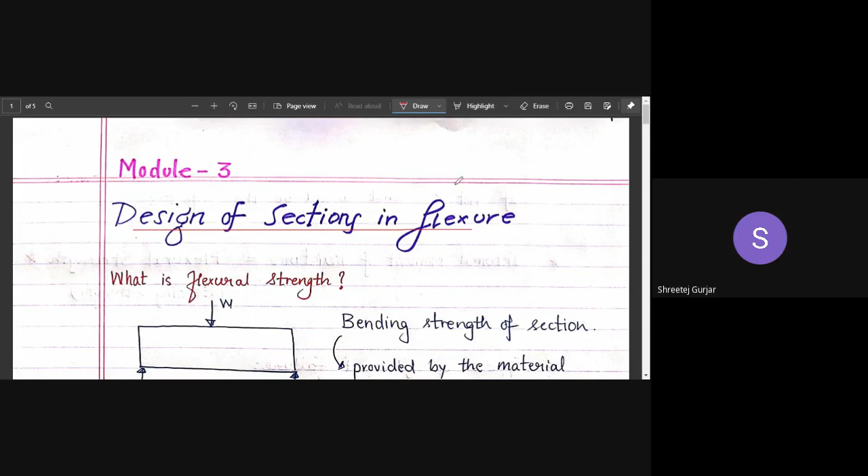In the previous class we had studied regarding flexural strength, various types of failures - failure in tension, under-reinforced section, over-reinforced failure, and several other failure modes.

We had derived flexural strength formulas, the moment of resistance formula MOR, for your rectangular section, or your T section in which your neutral axis lies within the flange. Neutral axis within the flange means it behaves like a rectangular section itself.

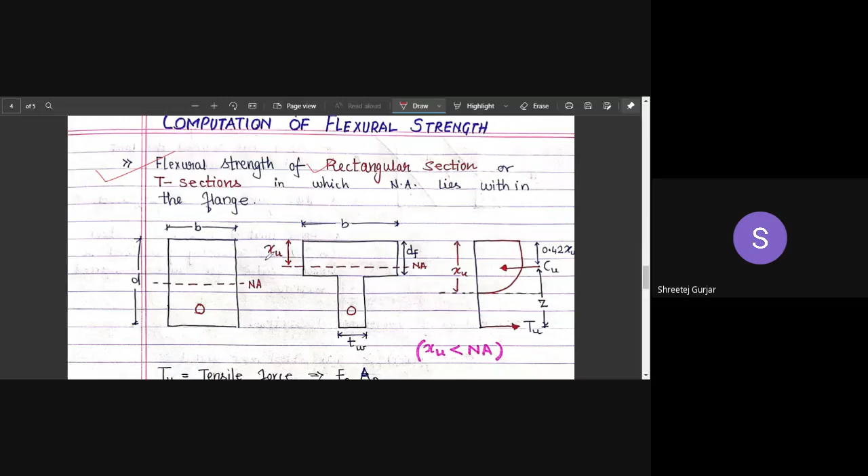So the formula which we derived is here: FPU into AP into D minus 0.42 XU. Keep this formula in mind, we will be using it further.

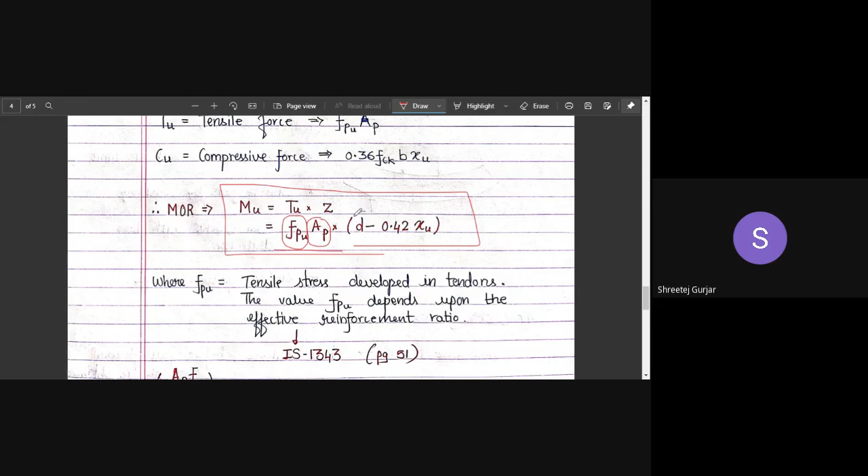The FPU will not be given to us directly - this will be found out from your code book, and we can calculate all the other things. I have told you how to use this particular code book to find FPU and XU by D - we will look into that when we solve problems.

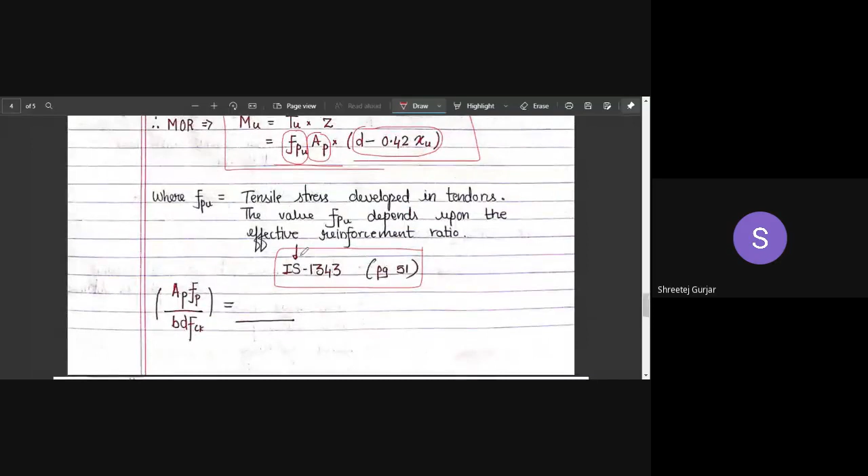Then for flanged sections, or when your neutral axis is below the depth of your flange - when your neutral axis is within the web - we have studied this particular thing.

We have derived this formula: moment of resistance, or flexural strength, equals FPU APW here - this part is for web, and this part is for flange. So FPU APW, similarly instead of this whole thing you can write FPU into APF. So this is the full form written here. You can use this, and D minus 0.42 XU is the same. Here we have to add one more bracket, D minus 0.5 DF.

So these two formulas we will require to solve your numericals. One more important formula you have to remember is this APF formula - very important, we will be requiring this.

Once you know APF, which we have calculated, all the things will be known. APW also we can calculate from here. D, XU - all these things are known. You can substitute and find out the moment of resistance.

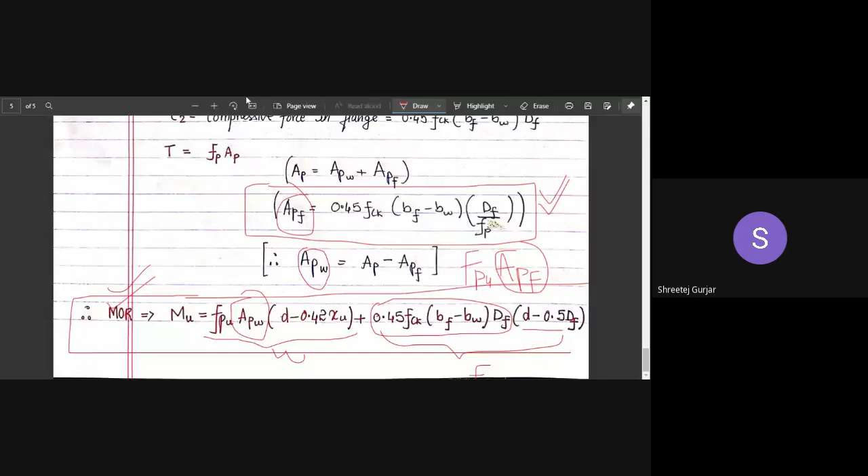So this is the first numerical. I hope you can see it on the screen. Can anyone please read out the problem statement for me?

Okay, so Shubham, are you there? Shubham Malji? Shubham? Yes, sir, can you please read the problem statement? Yes, sir.

A prestressed concrete beam, rectangular in cross section, 200 mm by 500 mm deep, is prestressed by tendons having an area of 600 mm square located at 100 mm from soffit of the beam. FCK is equal to 40 Newton per mm square and FP is equal to 1600 Newton per mm square. Estimate the ultimate flexural strength of the beam for the following cases as per IS code recommendation: first, if the beam is pre-tensioned; second, if the beam is post-tensioned with effective bond. Thank you, sir.

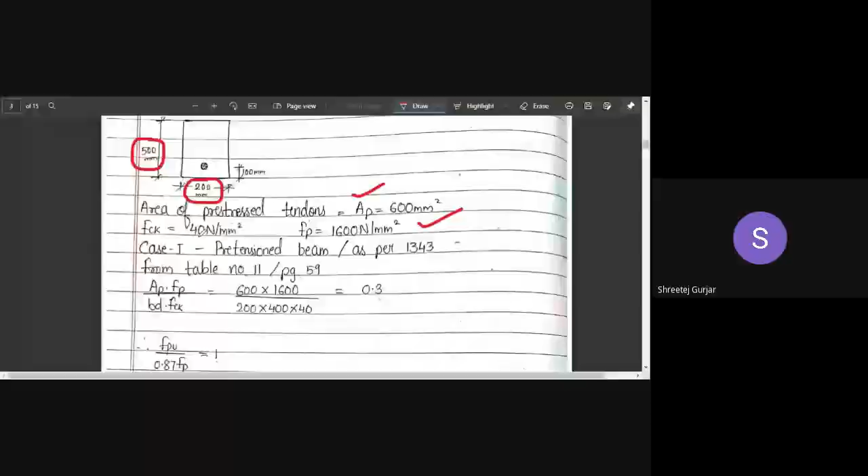Okay, then case one - we have two cases. The first case says we have to calculate the flexural strength as a pre-tension beam, from table number 11, page number 59. Let me just share this particular table with you - IS code, I'll share. Okay, there you can observe this particular table.

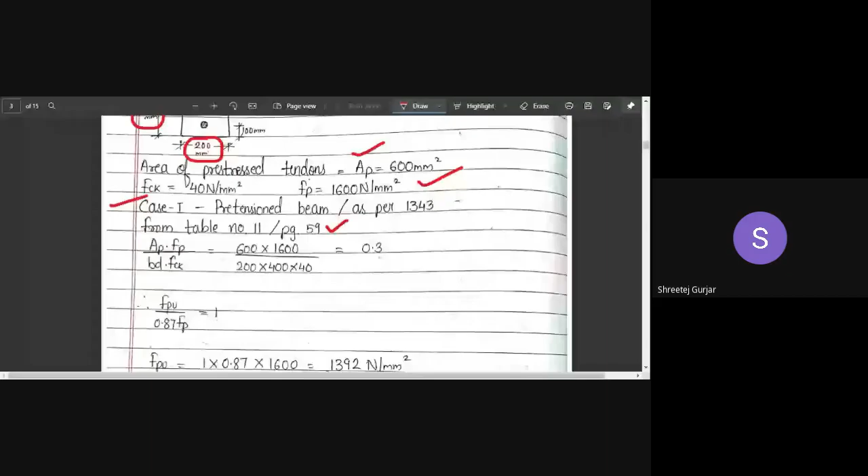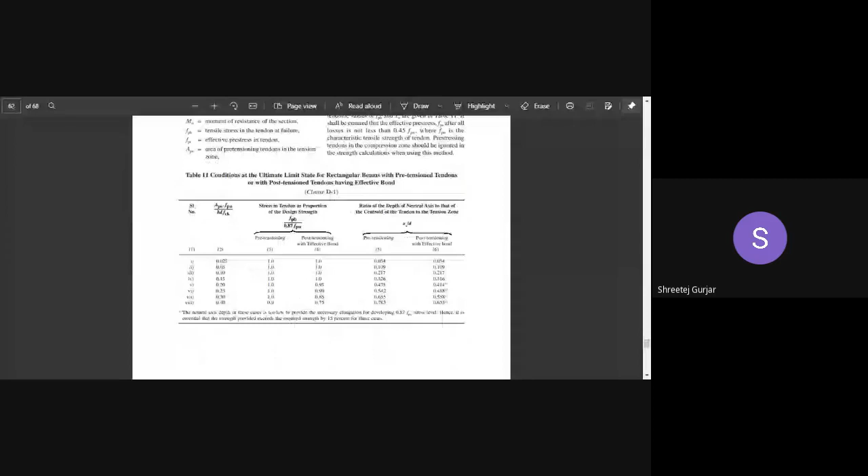Okay, so is the table visible? Table number 11, here you can observe, this is table number 11. Visible, sir.

Okay, so this table is applicable for both pre-tensioned and post-tension beams, but only in case of effective bond.

Sir, your voice is breaking, sir. Okay, when your beam has effective bond, you have to make use of this particular table.

Okay, is my voice clear now, or is it breaking up? Is it clear now? I hope it is clear. Yes, sir. Now it's clear. Yes. It is clear, no problem. Yes, sir.

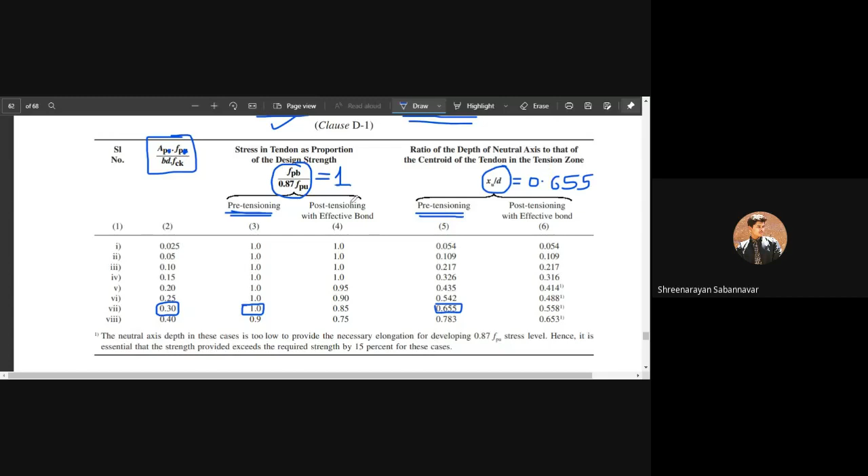Sir, can you explain the table again, sir? Maybe, yeah. Just a minute.

Okay, so this is AP into FP by BDFCK. AP is given to us. AP, that is area of steel, is given as 600, I think, right? FP is the pre-stressing force, stress, right?

Pre-stressing stress, that is also given. B, that is the cross-sectional area, that is also given, and FCK is also mentioned. So all these values which are given, you have to substitute and find that particular value, so it is equal to 0.3. Once you substitute all these values, you will get the answer as 0.3.

Okay, so 0.3 is here, so this is for this particular column. Then we have been given to consider the beam as pre-tensioned. So we have to use this particular column which I have underlined over here.

Okay, so for 0.3, the value for pre-tension beam is 1. The value of pre-tension beam is 1. What is the value 1 for? It is for this particular term, it is equal to 1. And this particular XU by D term is equal to

0.655. Okay, so what you have to do is derive this particular value, whatever 0.3 you get. For that, you have to check whether a beam is pre-tensioned or post-tensioned, and then you have to take out the value.

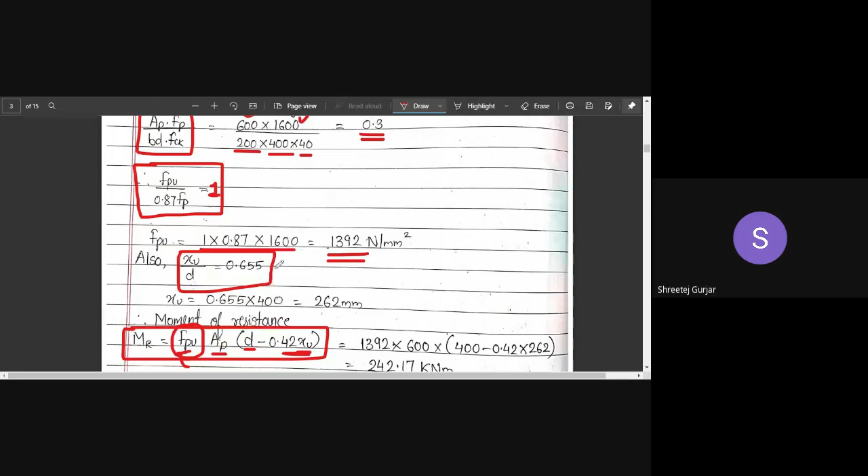The second thing that we derived from the table was this XU by D is equal to 0.655, right? This is the second thing which we have taken out from the table. So XU is unknown, which we need to find out. D is known, right? Effective depth is known, no problem. So 0.655 and D will come on this side.

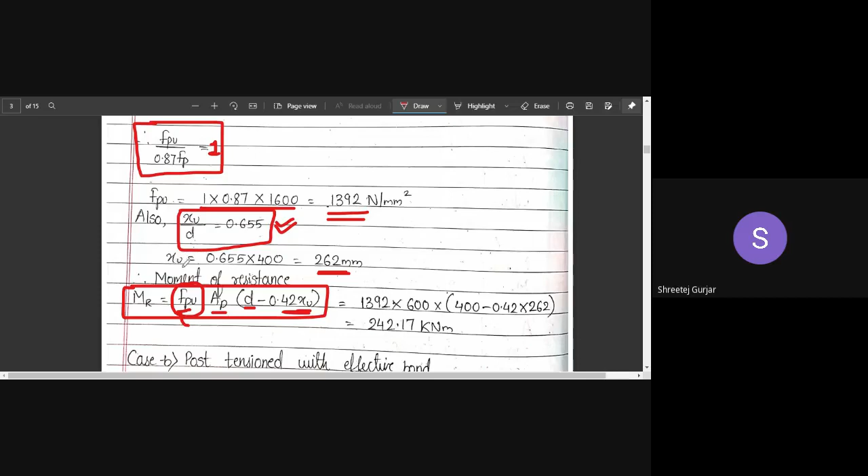So it will be multiplied by 400, which is the effective depth, so that is 262 mm, 262 mm. So we have found out the distance XU, right? XU, neutral axis distance, we have found out. We have found out FPU, all the other things are known.

So we can substitute back in this particular formula, right? MR, or moment of resistance, or ultimate flexural strength, is equal to FPU, which is here, FPU 1392 into AP is the area of steel, and then this D is effective depth. XU we have calculated as 262.

So substitute all this, make sure your units are proper, make sure all the units are proper, you substitute, and then you will get the answer 242.17 kilonewton meter. So this is moment of resistance, okay? MU or MOR, whatever you can denote it as, MU. Okay, so yes.

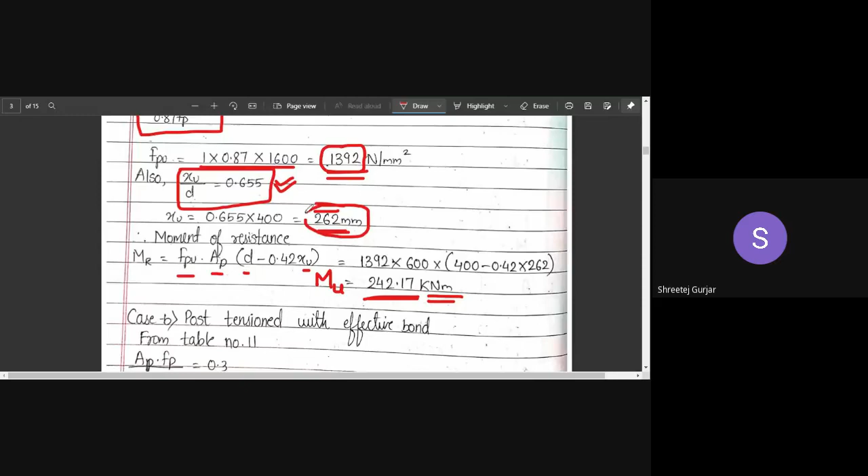XU in mm. This particular thing, XU, is in mm. It is nothing but the distance of the neutral axis, XU from the top.

Sir, that's okay, but the final answer should be in kilonewton meter. Yes, so you calculate this in your calculator. All answers are in mm, so the answer you will get is in Newton mm.

But what they have done is converted it to kilonewton meter, because it will come as a value in 10 power 6 or 10 power 9. So once you substitute in your calculator, you'll get a big value in 10 power 8 or 10 power 6 Newton mm. After that you convert it to kilonewton meter: divide by 1000 to get kilo, and divide by 1000 again to convert it to meters.

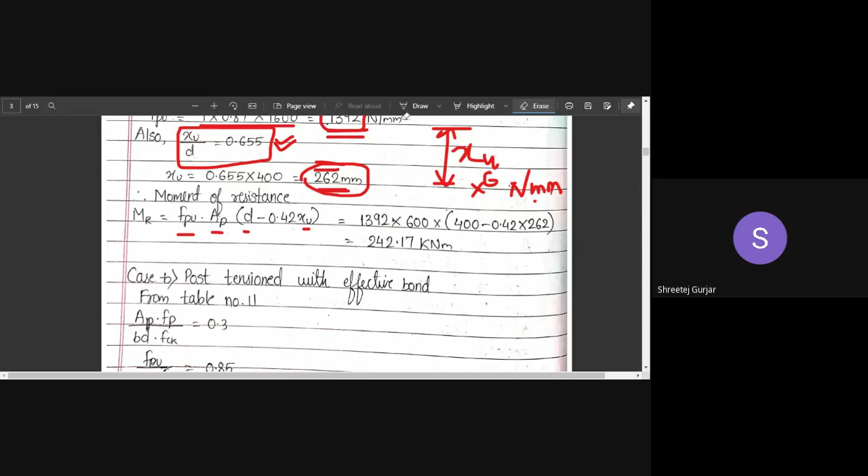Okay, so this is for when you assume your beam is a pre-tension beam. Next is when you consider your beam as a post-tension beam. Now we are going to consider our beam as post-tension one. You can see case B is post-tension.

So from the same table number 11, this value will not change. AP, FP by BD, FCK - this is what you have to calculate first. It is 0.3. So in the table, let me share the table now.

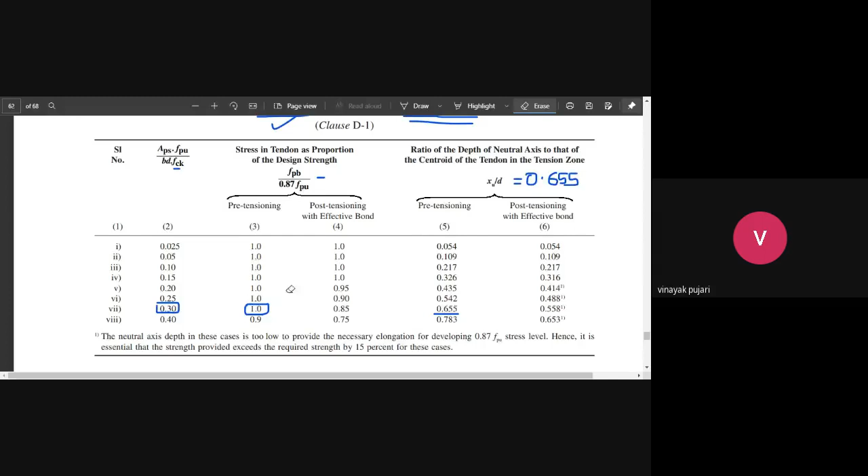Is the table visible? Yes sir. So from table number 11, this value we have calculated is 0.3. So 0.3, you have to check where it is here. If you do not have a whole number like this, if you have some in-between value, what you have to do is interpolate.

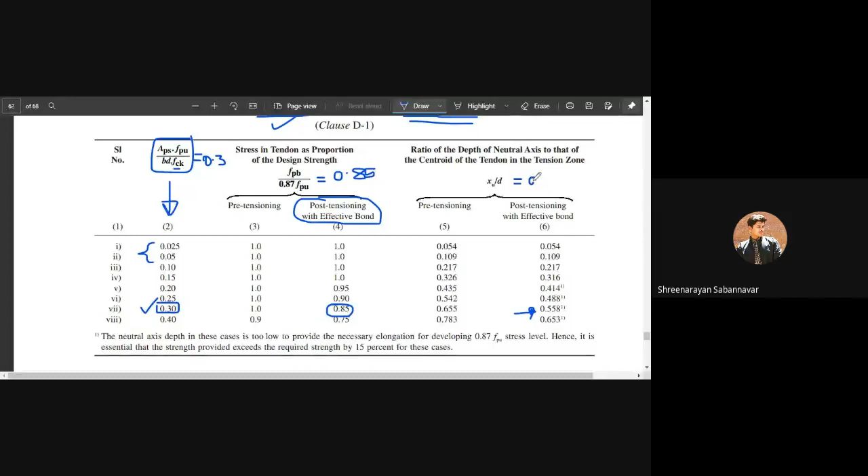Now our beam is post-tensioned, your beam is post-tensioned, so for 0.3 and post-tension, it is 0.85. So this term we have to equate to 0.85. Next, XU by D is equals to what? Can you tell me? It is 0.558. Correct, 0.558. So these two we will write in our notebook now.

Here you can see FPU, this particular term is equated to 0.85 and we have calculated FPU. Also XU by D is 0.558, which you told me, right? So D you multiply with this, you will get XU in mm. Substitute that back in your moment of resistance formula, and you will get the ultimate flexural strength of your PSC beam. This is a very simple problem for you to understand.

So is this particular problem clear? How to use table number 11 also, is it clear? Yes sir, understood, no problem.

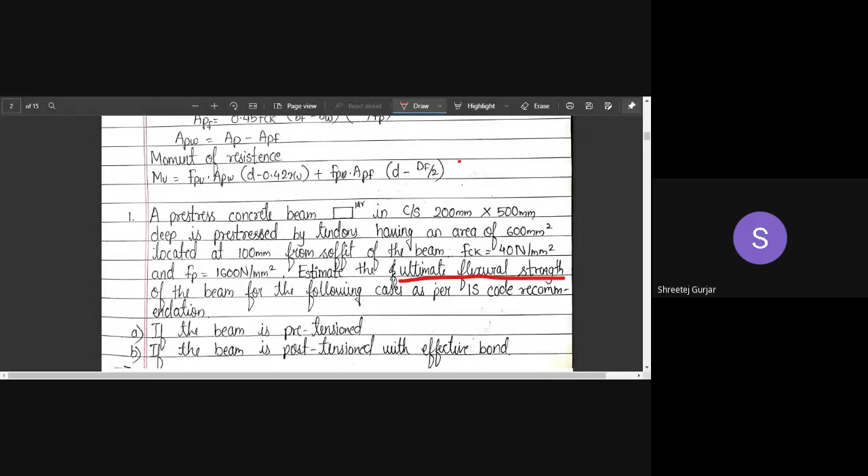AP is given as 4700, located at an effective depth of 1600 mm. So small d is given to us, effective depth. Next, if the characteristic cube strength of concrete and steel - this is FCK, characteristic cube strength of concrete, and this is 1600 Newton per mm square, the characteristic strength of steel. We will be needing these values.

Calculate the flexural strength at the limit of collapse in flexure for the T beam as per IS 1343 recommendations. So we'll write down whatever is given: AP is given, FCK is given, FP is also given. Now what we will do is assume that our neutral axis is within the flange.

Neutral axis is within the flange, we will assume, so it will behave like a rectangular section. So we will apply the formula used for rectangle, right? The first formula we will be applying. So what we need is FPU, we need XU. This will be taken from table number 11.

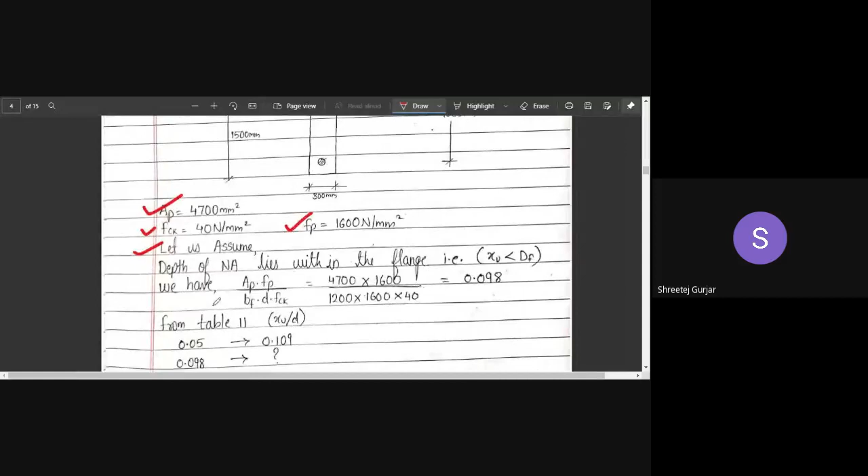Okay, so the depth of neutral axis lies within the flange. We have assumed that XU is less than DF, meaning the depth of our flange is 150 mm and our neutral axis is lying within the flange. So your XU value will be lesser than your depth of flange.

Okay, so we have to first calculate this particular value. For B, you have to use the breadth of your flange, BF, not of the web. You have to use BF over here. So AP is 4.

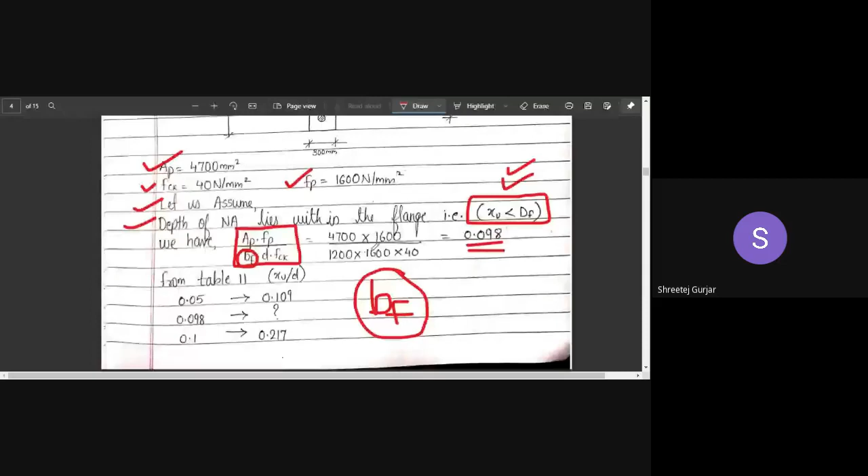The value is 0.3... 0.098, 0.098. So we will calculate only XU by D first. We will check whether the assumption we have done is correct, or whether we have assumed wrong. So first we will calculate XU by D. 0.098, remember this value.

Okay, so coming to table number 11, let us check where 0.098 comes. 0.098 will come here, right? It is coming in between these two values, correct? Yes, sir. No problem.

So we will calculate XU by D first, to check whether our assumption is correct. XU by D for pre-tension — our beam is pre-tensioned, so we have to consider these two values, 0.109 and 0.217. We have to interpolate now, and find out for 0.098 what is the particular value of XU by D.

Okay, we will move back to our notebook. So here, from table number 11, 0.1, 0.05 is taken from the table. This value is also taken from the table. This is unknown — we need to find for 0.098. So you can interpolate, right? I hope you know how to interpolate. So if you interpolate, you will get the value of XU by D as...

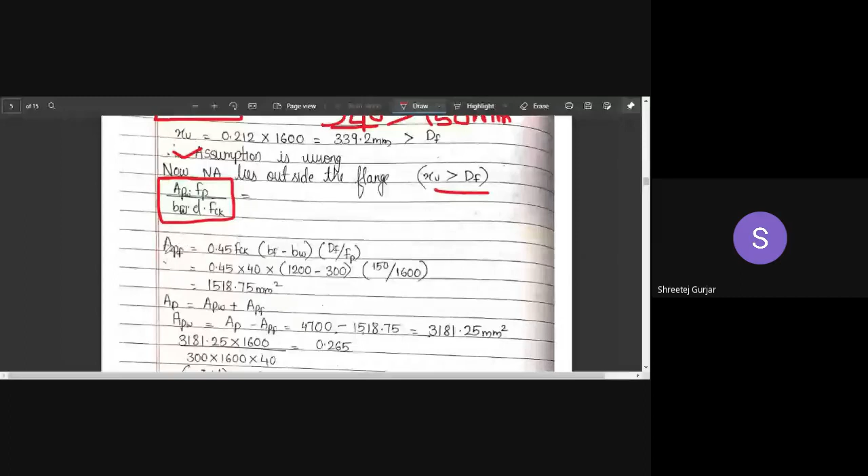Okay, so we have to use this particular thing to refer to table number 11, we have to calculate this. BW is known, all these things are known, but APW is unknown here. So we have to calculate APW first. To calculate APW, we have to first calculate APF, and from APF we will calculate APW.

Okay, so the APF formula we have is 0.45 FCK times (BF minus BW) times DF, divided by FP. You have to remember this formula. Then you can substitute all these values — FCK we know, BF the width of flange we know, width of web also we know, then depth of flange, and FP, the characteristic strength of steel.

Okay, all these values we have substituted. We have got the value of APF as 1518. Then AP is equals to area of steel in web plus area of steel in flange, the total thing. AP is given to us as 4700. APF we have calculated, so if you minus area of steel in flange from total, you will get the area of steel in web, that is 3181.25 mm squared.

Now we can substitute back in this formula. APW we can substitute 3181 here. FPBW, 300, D, FCK, all these things we have substituted. We have got the value as 0.265. Now moving back to table number 11.

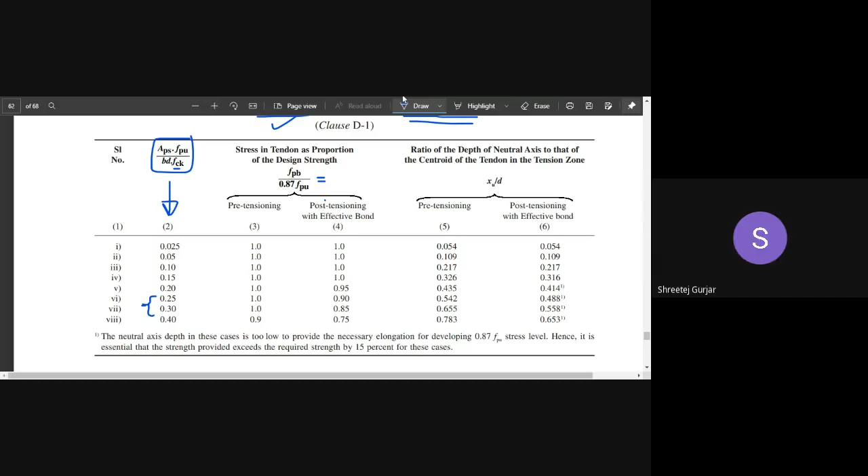So is it a pre-tension beam or is it a post-tension beam? Pre-tension or post-tension, let me check. I think it is a post-tension. Pre-tension, okay, it is pre-tension, correct. Pre-tension. So it is a pre-tensioned beam.

So you have to consider these two values for XU by D and for this particular thing. We have to interpolate. So what is our value? 0.26.

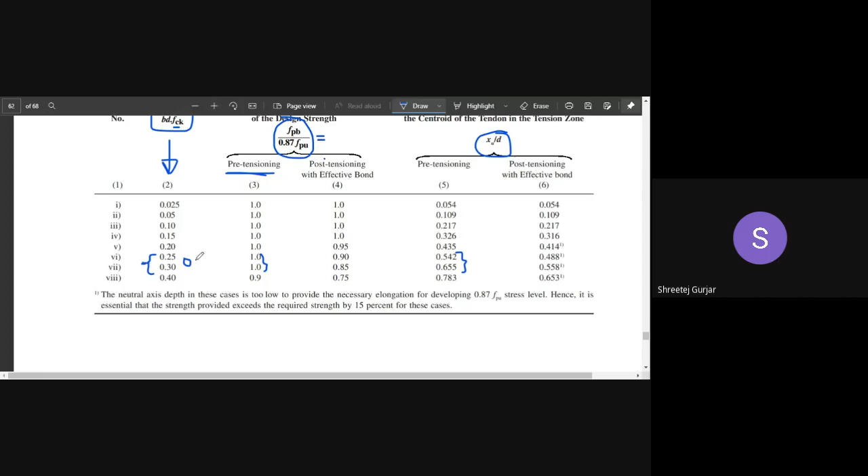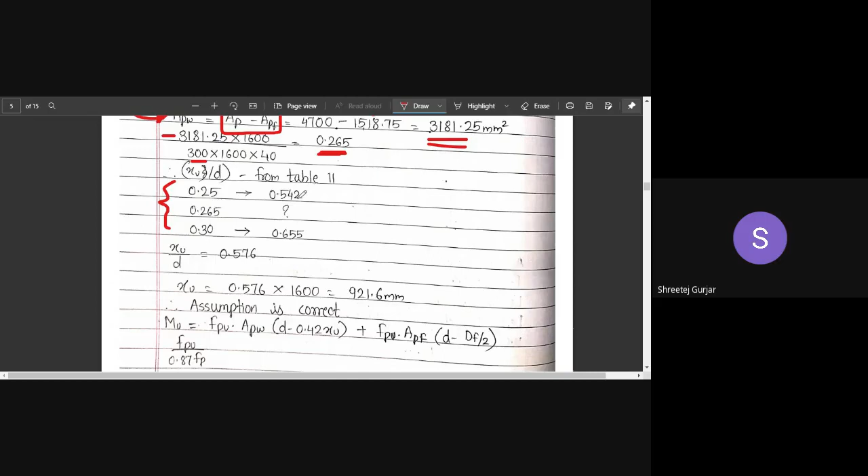Okay, coming back, you have to note down from the table and come back to your notebook. From table number 11, we have taken this XU by D. We have to find out the interpolate and find out the middle value, that is regarding our 0.265.

We have calculated, and what is XU now? XU, we have got it as 921 mm. Okay, assumption is correct, meaning XU is lying within the web, no problem.

Then FPU value, we need FPU. This is also got from table. Interpolate and find this middle value. So we have got the middle value and we have substituted. We have got the FPU value as 1392 Newton per mm squared.

So we know the formula for MOR, moment of resistance. This part is for web, this part is for flange. FPU is common everywhere. This is APW, here it is APF, D minus 0.42 XU, D minus DF by 2.

You know all these things, all these values are known. We can substitute and calculate the moment of resistance. It is coming as 9077, almost kilonewton meter.

Is this numerical clear? If you have any doubt, please let me know. I hope it is clear. Is it clear, guys? No problem? Yes sir, no problem. Others also please reply. Yes sir. Sanket sir, Ranganath. Then we have Prerna sir, Salahuddin. Yes sir, Shravan, yes sir. Okay, moving on.

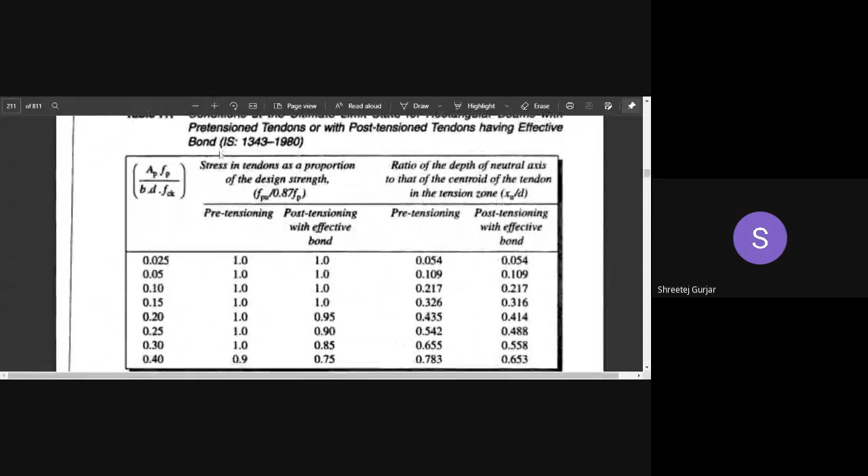Is the table visible? Okay, so this table is used for bonded tendons, and this other one will be used for unbonded tendons.

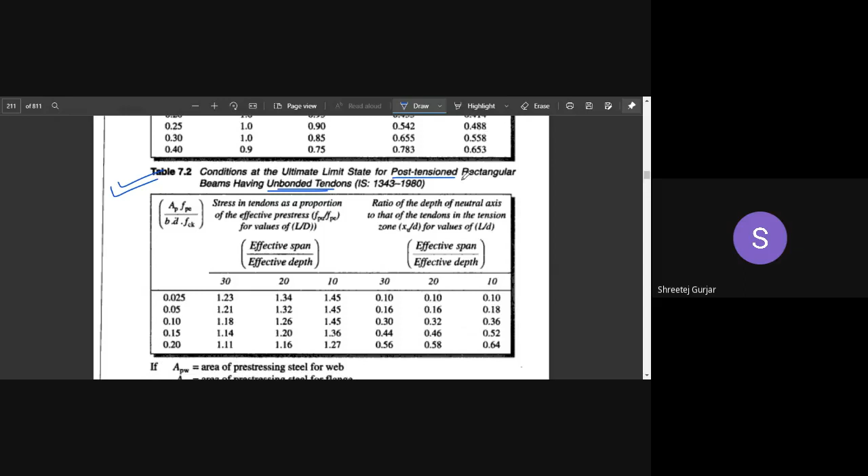Similarly, this is divided into pre-tension, post-tension, all those things. Here you can see it will not have pretension because unbonded will only be in post tension, since all pre-tension beams are bonded ones. Only post tension beams are considered in this particular table for unbonded.

So this particular term we found out - what was its value? 0.15. You can observe it here. Now L by D ratio - we have to find out first the length by depth of the beam.

Effective span by effective depth - what was that value? We have to calculate. Let us see. This is effective span by effective depth. So effective span was 15 meters.

Effective depth is 1 meter, correct. So 15 by 1 is nothing but 15. Coming back to the table, so what is the effective depth - sorry, L by D ratio.

It is 15, which is in between the table values. This is your effective span by effective depth values you have to refer to. It is neither 10 nor 20, it is in between - it is 15.

So we have to interpolate now. We take these two values and interpolate to find for 15. From here we will get the FPU by FPE value after interpolation. From here we will also get XU by D - effective span by effective depth is 15, which again is in between.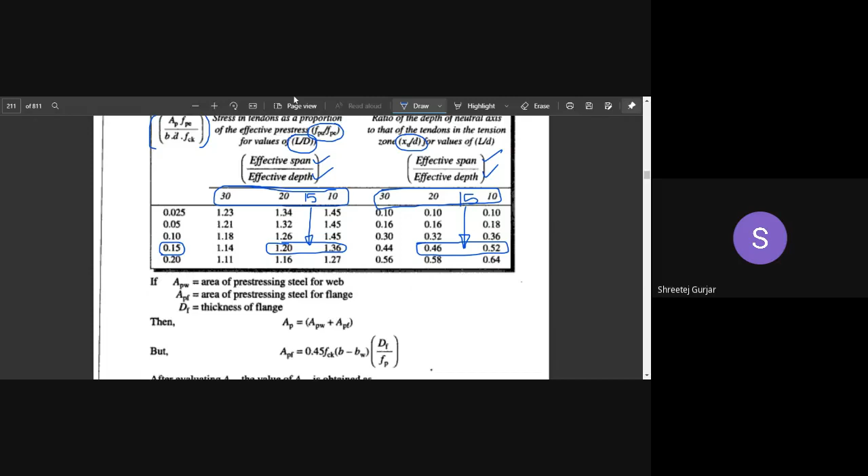Moving on, coming back to the notebook - FPU by FPE, this value after interpolation we got as 0.128, or 1.28. Correct? Yes sir, correct. You try and interpolate, you will get the same value - 1.28. So FPU by FPE value equals 1.28.

So we need the FPU value - FPE value is already given to us, the effective stress is given, so you take that to the other side, multiplied, and FPE is 1000 Newton per mm square. So multiply and you will get FPU. FPU is done. Next, XU by D value.

XU by D, you can interpolate it for 15. So XU by D value is 0.49, it is in between these two values, in between these two FPU values.

Which part did you not understand? FPU? Yes sir, this part - how to calculate it. Have you understood the table? Yes sir. How we have taken it out from the table, have you understood?

No problem, so what we'll do is we'll try to interpolate. Remember these two values, 1.2 and 1.36.

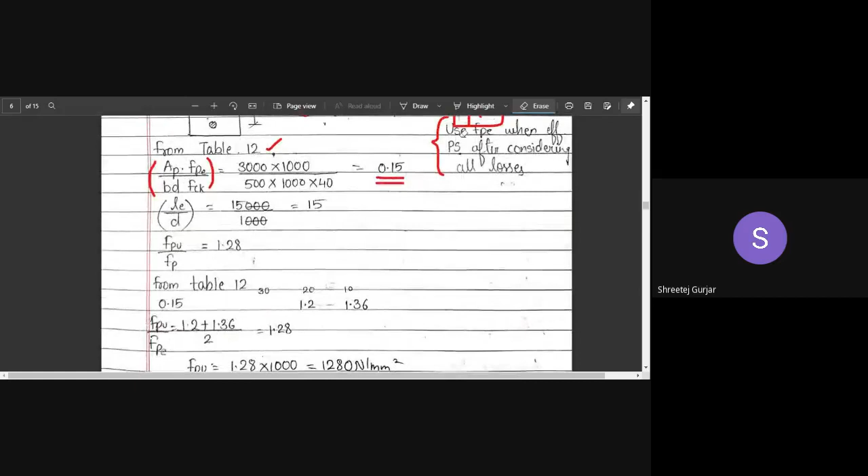So FPU value I found out. Similarly, XU by D you can interpolate. So here also they have taken average, because it is center, or between 10 and 20, at the center it is 15, so they have taken average. So it has come as 0.49.

So XU value will be what? This D will go on the other side, so it will become 490 mm. Correct, 490 mm. So we can substitute in the MOR formula, moment of resistance formula. FPU we have found out, AP is known, D is also known, XU we have calculated, 490. So substitute all these values, take care of units, and then you can write it in kilonewton meter.

3050 kilonewton meter is the moment of resistance of this particular beam, flexural resistance to be precise. Is it clear, guys?

Yes sir, clear sir, no problem. Yes sir. So the value we got after interpolation, is it in meters, sir?

We are converting into mm, it is in meters by multiplying by 1000. Which value? That XU by D value and this FPU, that is not in meters. This thing we have multiplied by 1000 because FPE value is 1000.

This value is going here, effective value, effective is 1000, so this is unitless.

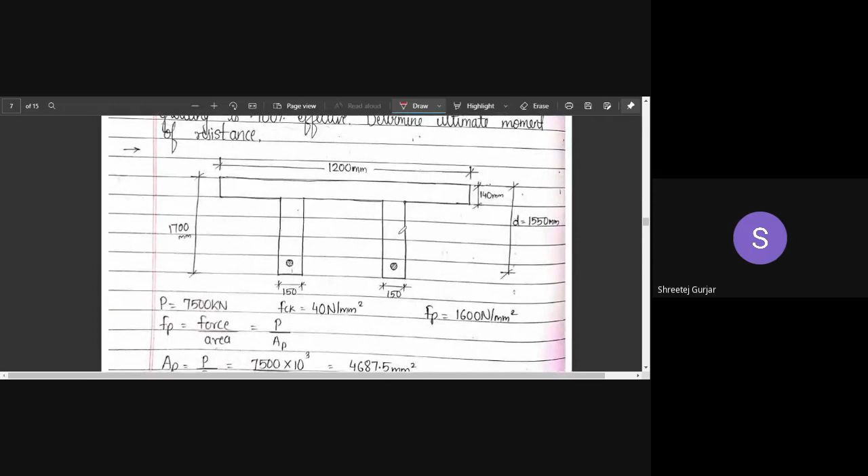Okay thank you. So you can see we have a double T section. No problem. The flange width is 1200, BF. Then this is BW, 150, thickness of your web. Then depth D, effective depth is given as 1550. This is the overall depth, do not use this depth, this is capital D. Do not use this depth, we have to use effective depth up to the level of steel. The depth of flange is 140 mm.

No problem, so what else have they given us? Prestress with the effective prestress, this effective prestress is given, no problem, in kilonewton. It is given in terms of force through a cable located at a distance of 150 mm from the soffit, and then characteristic FCK value is given as 40.

FCK is 40. Assuming that grouting is 100% effective meaning it is a bonded tendon, it is a bonded tendon, so it is a post-tension beam. Because of that it is taken as grouted - only post-tension beams are grouted. Sir, grouted means what sir? Grouting means putting cement slurry inside your duct.

After you prestress and apply your anchor, there is a gap - suppose this is your duct and this is your steel wire or tendon, there is a gap here, you can see there is a lot of gap. So that gap is filled by grout, injected later on. Cement slurry or other chemicals like epoxy are mixed, and then this part is grouted so that there is proper bond and your steel does not move inside the duct. So this is grouting.

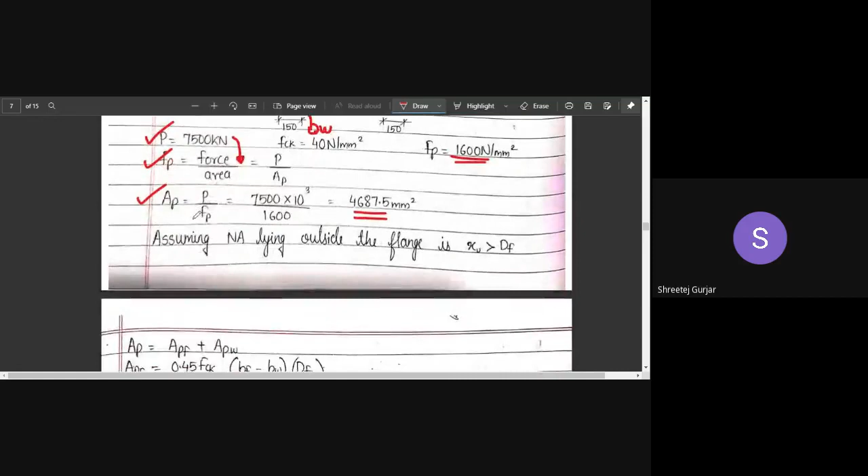Area of steel we divide, AP right? AP is not given, I guess AP is not given. Force is given and stress is also given, force is given, we do not have area of steel. So area of steel will be P by FP. So area of steel we have found out, no problem, 4,600.

Now the first thing we have to do is assume that the neutral axis is lying outside the flange. Why have we assumed it lying outside the flange and not inside the flange? Why have we assumed the second case as the first case? Usually we assume that the neutral axis is lying within the flange, that's the first case we usually do. But why have we adopted it in reverse format here? What logic can you think of?

Why have they done this? Because two webs are there, two webs are there. Can you explain a bit in detail? Why, what happens if we have two webs? So the weight adds up, no sir?

So I think you know why it is provided, but you are unable to explain. CGC will be here because of the weight distribution - you're saying CGC will automatically shift downwards, it will be somewhere here, right? Okay, so that is the logic which you have applied.

And one more thing is, why will they provide two webs? Because the neutral axis is below, that's why they have provided two webs, right? So if it was over here, what was the need to provide two webs? So that is the logic behind why they have used the second case.

XU is assumed to be greater than DF. Now we have to calculate the value of XU and check whether our assumption is correct or wrong. So this particular value we need to calculate for referring the table: APW by FP divided by BW FCK. Here PW is used, APW and BW is used. APW we do not know, so APW is calculated from this particular thing as we have done previously. APF first we need to calculate for that.

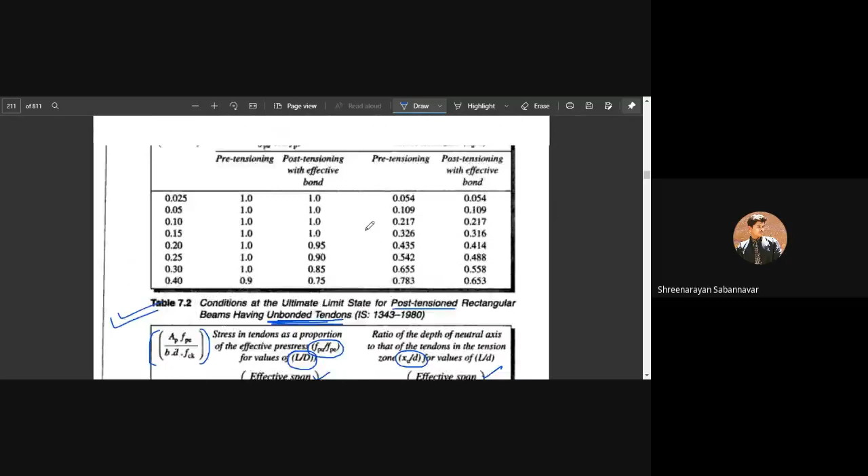It depends upon bonding - grouting, what you are telling, correct. So because in the question they have mentioned that there is effective bond, effective grouting is there, so there is effective bond. Hence we have to refer this particular table, table number 11.

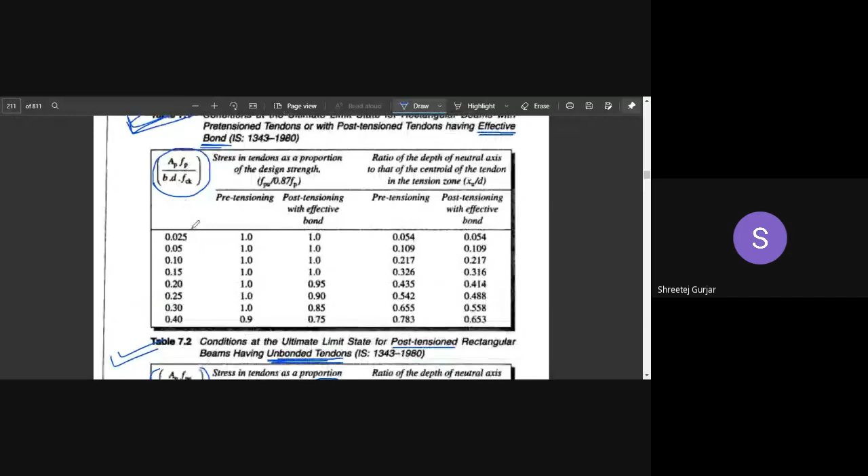Okay, so AP, what was the value of this particular term? We have calculated just now - 0.28. So it falls in between these two values. So it is what? A post tension beam, right? It is a post tension beam because grouting is done in post tension. Post tension grouting is needed, it is not needed in pre-tension.

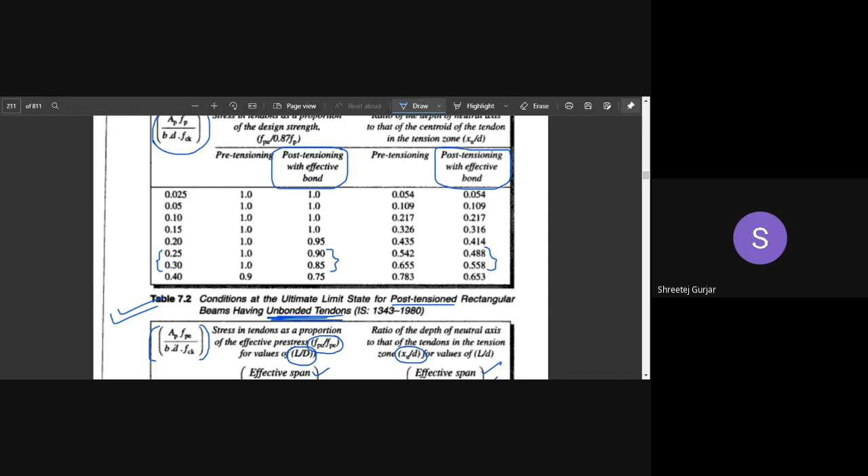So we have to interpolate and find out our values. These values are taken from table and equated to this particular value, and we have to interpolate and then find out. So you can see we have taken XU by D first. So it is in between, so we have to interpolate, and after interpolation we have found that it is 0.53.

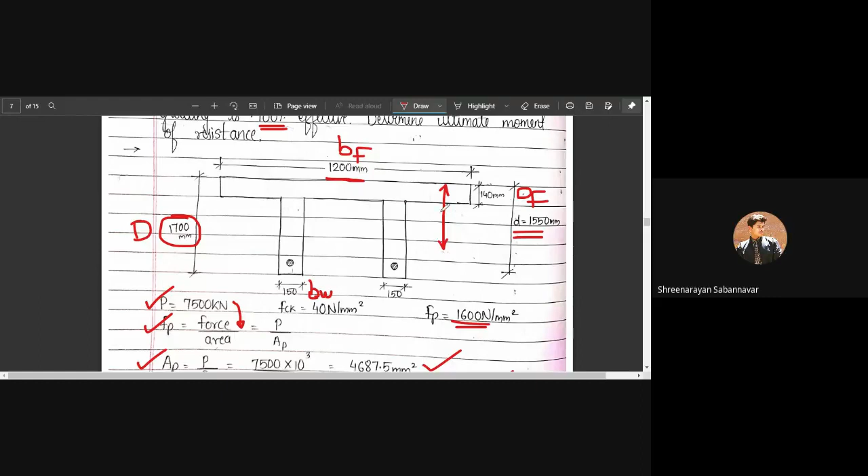So you can see clearly it is larger, so neutral axis is in the web. Our assumption is correct, no problem - 821 mm. Assumption is correct, no problem.

Next, for this particular term, we have to interpolate and find out. So we have found out after interpolation, it is 0.87. So FPU, we need FPU - all for FPU we have calculated, so it is 1211.

So this big formula we have for web and for flange. Substitute all these values, we know all these values now. FPU is known, APW we have calculated, XU also we have calculated, APF also is known. Substitute all these things, take care of the units while substituting, and you can see it is coming as 10 power 9 Newton mm. I've told you it will come as a very large value, so you can divide this by 1000 and convert it to kilonewton.

Divide again by 1000, convert Newton mm to meter. So in the end you can write in kilonewton meter - it is 8,128 kilonewton meter, a very large value, right, 10 power 9. So you can see the flexural strength of a PSC beam is very high, it can handle very large bending moments and very large loads.

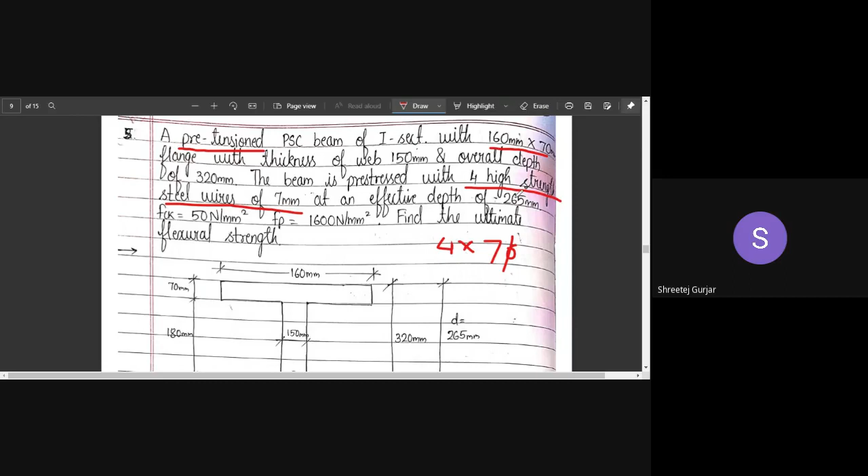4 wires of 7 mm diameter. And the effective depth of the beam is 265, which is mentioned over here as small d. FCK value is given, no problem. FP value is given. We have to find the ultimate flexural strength, or what we call as moment of resistance of the beam, also denoted as MU.

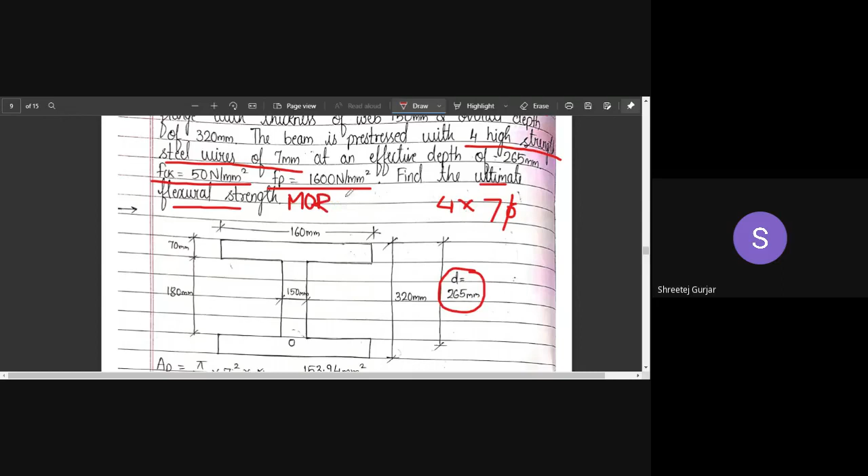So AP value we can calculate. AP value is what I have written here, right? 4 number of bars of 7 mm diameter. So pi by 4 into 7 squared into 4. Pi by 4 into 7 square is for one cable or one wire, and how many wires do we have? We have 4 number of wires. So AP value will be 153.

So this term we can find out next: AP into FP by BFD FCK, because it is a symmetric thing, right? So neutral axis will be over here. Let us check whether neutral axis, right, it is 68, it is 68, right? Neutral axis will be in this region, obviously it will be in this region somewhere over here.

But what they have done is they have taken first APBF, meaning they have assumed that the neutral axis lies within the flange. First case, meaning they have assumed that it lies somewhere over here. So the first case we will check whether the neutral axis is lying within the flange. Let us check for that.

So AP FP by BD FCK, but since we have assumed that it is lying within the flange, you have to take flange width, that is 160. If you assume that it is in the web portion, then you have to take the thickness of web, BW will come. But that is not the case now, we are assuming it is in TF, so we are taking BF, width of the flange. No problem, so substituting all these values, our term value is coming as 0.12.

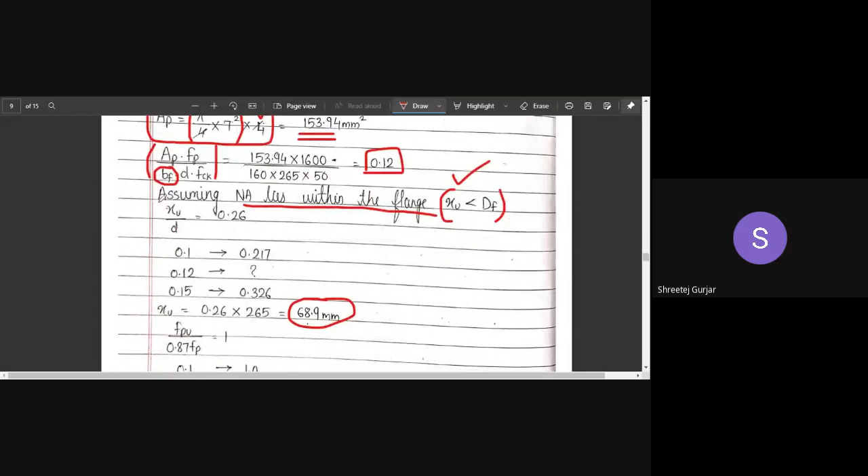Then XU by d from the table. We can take table number 11, pretension beam. So interpolation is needed because the value is 0.12, which is lying between 0.1 and 0.15. So interpolate and find out, and hence we have found that the XU value, the neutral axis, is lying 68 mm from the top.

So what is the flange depth? It is 70 mm, right, you can see it is 70. So you can see that 68 is lesser than 70. Hence our assumption is correct, neutral axis is lying within the flange, no problem, assumption is correct.

Surprising, very surprising, okay, no problem. It is very easy for us to solve now, no problem.

So you can calculate FPU from the same table number 11. FPU is got as 1, so multiply that: 0.87 into FP multiplied by 1, so I've got the FPU value. You can substitute back in the MOR, moment of resistance formula, and calculate the moment of resistance. You can do that as homework. So that is regarding this particular problem.

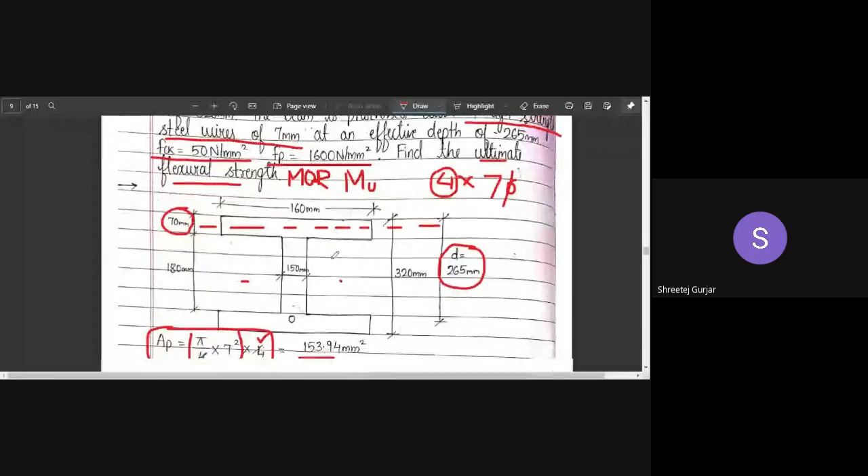So it seems a very complicated problem, right? We have an I section, all those things, but if you just check with the first case itself, it is coming out as true. So no need of going for the second thing, calculation is very easy. So in the exam, don't be scared by the looks of the numerical, just go through, just try to solve it, you will find out it is very easy. So I assume if it was not within the range, what do we have to do if it is not in the range?

How to guess that assumption, sir? So here what they have done is they have assumed directly, because they will already be knowing the results. Based on that, they form the question. So they know the thing, that's why they've done it that way. But in exam, you have to do trial and error. You have to assume the first thing, and if it fails, then go for the second thing.

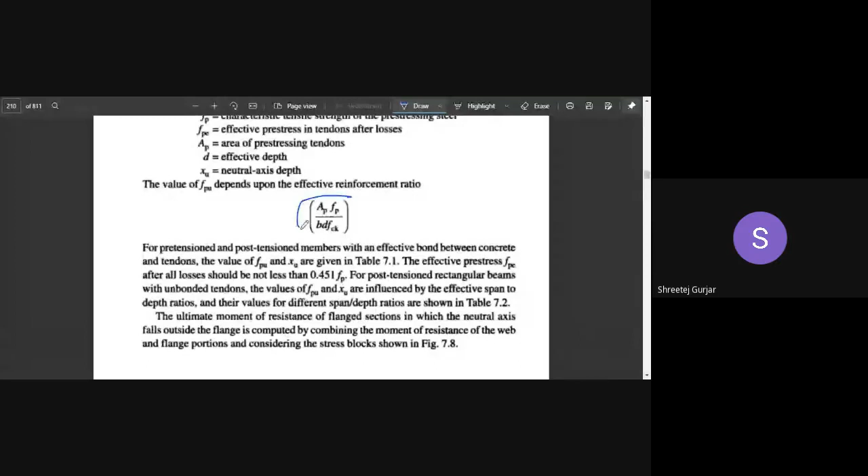These are VTU notes, sir. Which one, what was the question? Sir, these notes are from VTU website, sir. These notes are from the textbook, your Krishna Raju textbook. If you have it, you can refer to it. Same thing is there in the textbook, Krishna Raju, right? Here you can see. This is the Krishna Raju textbook which we are referring to, right? You can see this convention we are using. Okay, Krishna Raju.

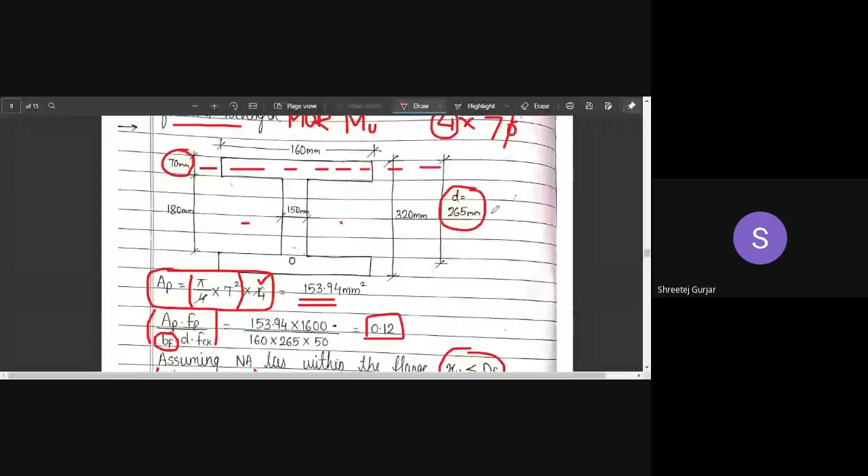There is no such thing as VTU notes. VTU does not provide any notes. VTU e-learning is there, but hardly some subjects are covered, not all subjects are there in that. Such schemes are changing every year or two, so VTU has stopped giving notes. So some major subject notes you can find on the VTU site. VTU e-learning is there.

Regarding assumption, make sure there is no hard and fast rule, no thumb rule, right? So what you have to do is assume the first thing, and if it fails, go for the second thing. Because if you go directly for the second thing, you might not check whether it works for the first case. So make sure you go serially. First check for the easier case, then go for the harder one. Don't check the harder one first and then go for the easier one.

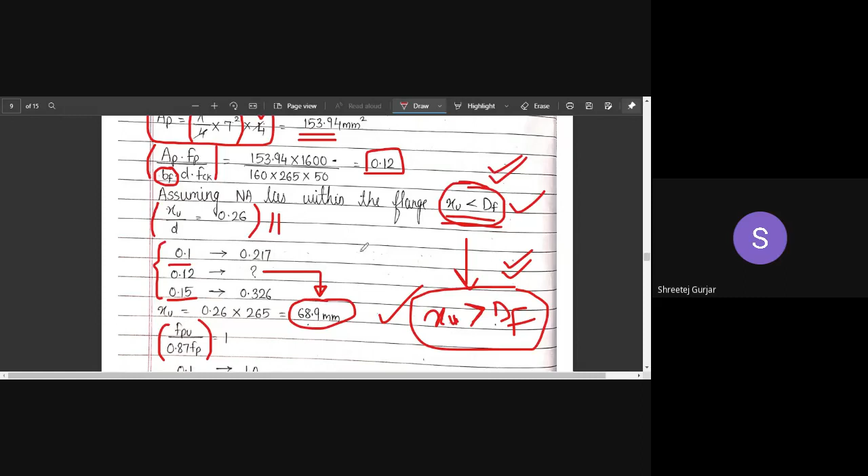So this is regarding the I section. Moving on to an unsymmetric beam. You can see we have an unsymmetric I section over here. The previous one was a symmetric beam.

An unsymmetrical I section bridge girder has the following sectional properties. The sectional properties are given. Centroid location is also given. The centroid is located at 580 mm from the top. You can see this is given over here. This is CG. CG of concrete is given.

Next, the tendons. The girder is used over a span of 40 meters. Span is 40 meters, very large span, you can just imagine. The tendons are unbonded - very important, they have given here that it is unbonded, meaning you have to refer to table number 12. The tendon has a cross section of 7,000 mm squared with a parabolic eccentricity of 1220 mm at the center of the span. FCK is given, effective pre-stressing value is given, no problem. We have to determine ultimate flexural strength.

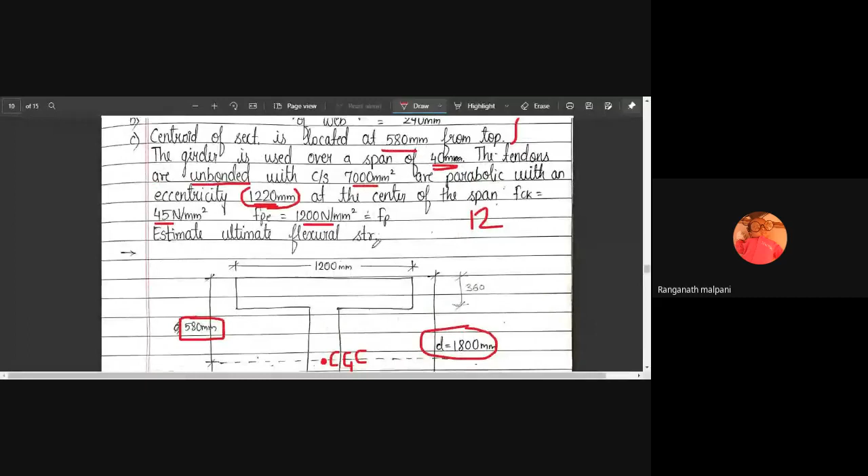So where is this eccentricity used now? This is used over here to calculate D, small d. Eccentricity, how much have they mentioned? This thing, 1220 is the parabolic value, right? The tendon is unbonded with cross section, parabolic with eccentricity 1220 mm at the center of the span.

At the center of the span, but why have they taken this 1800? Can you identify? Sir, effective depth of steel, sir. Effective depth of steel - where have they mentioned this 1800, or have they calculated it? The total depth of the beam, the total thickness - this is the thickness, width and thickness is given. Unsymmetric I section is given, centroid of the section is given, web thickness is given, but nowhere have they mentioned the effective depth in the question. This depth is not mentioned anywhere.

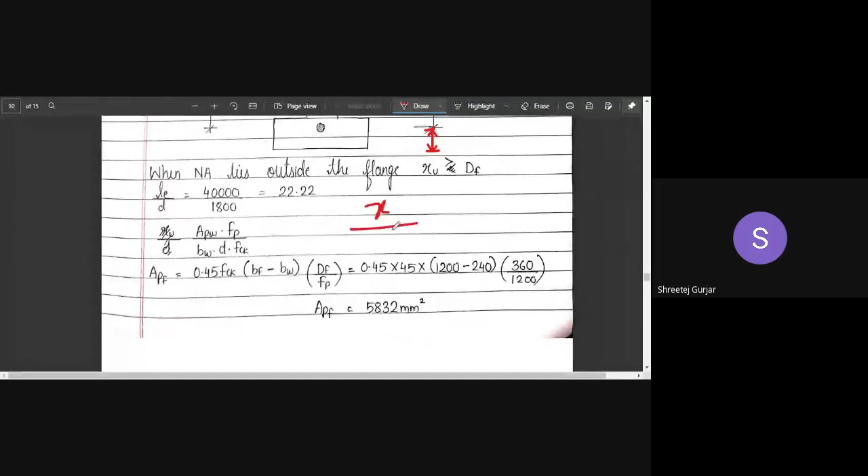Can you find out where this XU by D comes from, sir? They might have done it there. XU by D, but XU is unknown, D is also unknown over there. From XU by D, say some value 1.2, what we do to calculate XU is take it over here and multiply by D, which is known. But here D is also unknown, XU is also unknown. This is not XU, I think. This is the centroid of the concrete. CGC they have given us 580. Let us check what they have done.

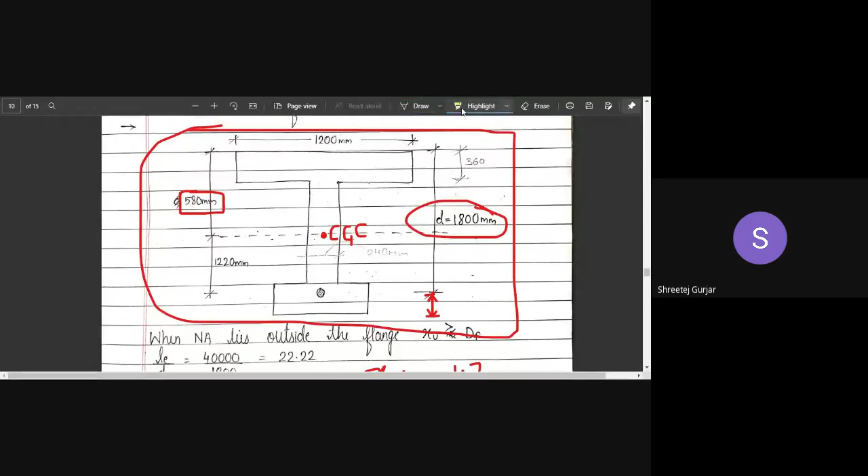XU they have calculated later on, you can check it. I think this particular figure is given to us. Yes, this is mentioned in the figure itself. D is mentioned, it is not given in the question, it is mentioned in the diagram. So let us not worry about this. We will calculate the remaining things.

So this is given, we will think that this is given because this is not mentioned anywhere in the question. So D is given to us. Because this is unbonded, this is an unbonded beam, the tendons are unbonded. So we have to go for table number 12.

Table number 12 is of a different criteria wherein we have to calculate effective span by effective depth, along with this particular equation and term. We have to calculate span by depth, that is necessary. So we will do that.

So span by depth is effective span by effective depth. Effective span is 40 meters, effective depth is 1800. So this is coming out as 22.22. No problem, so that is done.

Then the term which we need to calculate, that is APW into FP by BWD FCK. So what they have done is they have assumed that the neutral axis lies outside the flange, not within the flange. It is somewhere here below the flange. So they have assumed that.

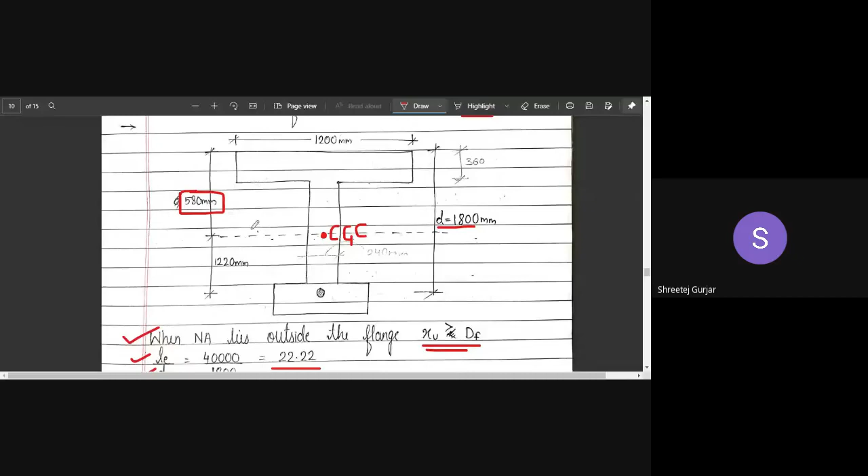Then APW is not known. BW, all these other things are known. So to calculate APW, first we have to calculate APF. We have a formula to calculate APF, you can substitute all these values and calculate APF, all these values are given, no problem. What is APW? Total area of steel minus APF, which we have just calculated, will give you APW.

So APW into FP by BW. Take care, you have to substitute width of web as 240, D into FCK. Substitute and you have got it as 0.072.

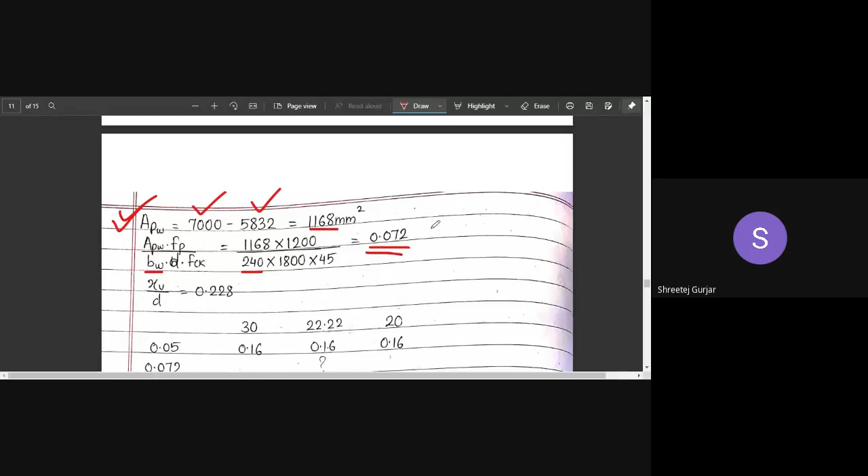0.072, now referring to the table, let us check where 0.072 will come in which part. It will come here, correct, it will come in this part.

And what was the effective span by depth ratio? That was 22.22. So where will 22.22 come? In between these two, it will come over here, around 22, correct, so we have to take that into consideration.

We have to do this, I think we have to double interpolate. We have to interpolate over here also, and we have to interpolate here also, in between, and in this part also. So what we can do is we can either take the effective span as 20, round it off, or interpolate here and find out.

Let us see what they have done. Can you observe here? This is also interpolation, a double interpolation is required, because it is lying in between here, and this is also in between. No whole number, so you have to interpolate.

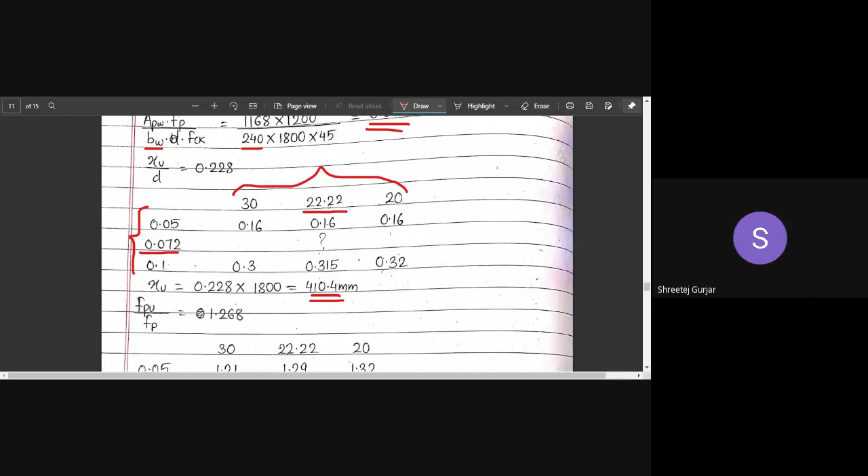Can you interpolate? Do you know how to interpolate? Yes or no? Yes sir. Okay, you can try and interpolate. So that value after interpolation, they have got it as

0.228. So in exam, you have to pray that this type of double interpolation should not come. An easier one, if it comes, you are able to solve it quickly. Otherwise this double interpolation will take a lot of time.

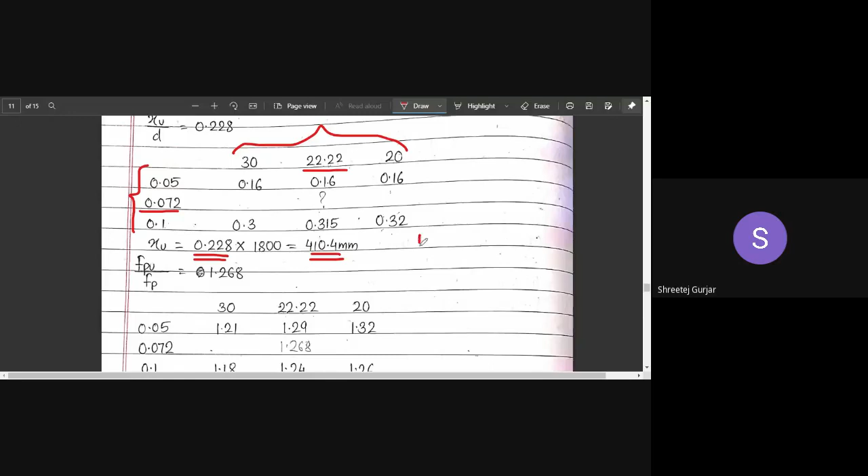So XU value is 410. What was the value of DF, depth of flange? Let us check, depth of flange was 360.

360, and XU is how much? 400 and something. So it is larger than DF, so our assumption is correct, no problem, XU is greater than DF. Correct, no problem. So what will happen in exam is you will not be knowing which one is true.

So first you will assume that XU is lesser than DF. You will calculate, you will do double interpolation, and you will find out that this is false. Then you will come here, again you will do double interpolation, then you will find out that it is true. It will take a lot of time in exam, so make sure you practice properly the double interpolation and all those things.

Okay, so moving on, FP by FPU by FP. This is also got from the table.

This is got from table by double interpolation. You can see we have to double interpolate again. So this particular value we have to find out, that has come as 1.268. So FPU value will be this value into FP. This FP will come over here, multiply by 1200. So we have got FPU.

Okay, so we have this particular big formula for your moment of resistance. This is for web, and this particular term is for flange. All these things are known. Properly substitute and calculate. You will get the answer.

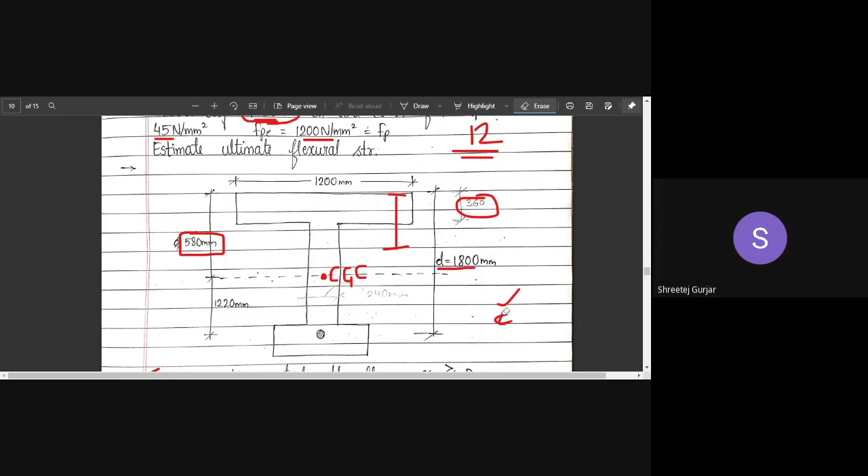Don't get scared. Directly go ahead with the problem. Okay, clear? No problem, guys. Is it clear? Yes, sir.

Okay, we will try with one more numerical. I think we are in the last numerical.

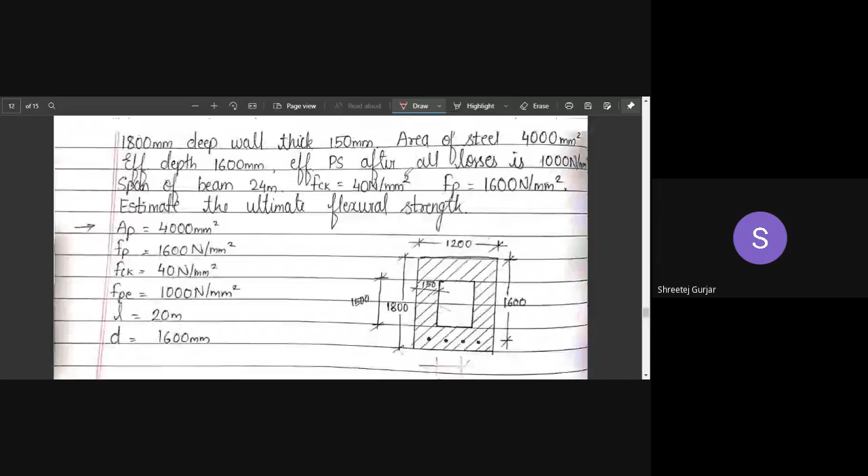Okay, so here we have a post-tensioned bridge girder. You can see we have a girder. Particularly, it is a post-tensioned girder of a bridge with unbonded tendon. Very important. So we have to refer table number 12, post-tension section.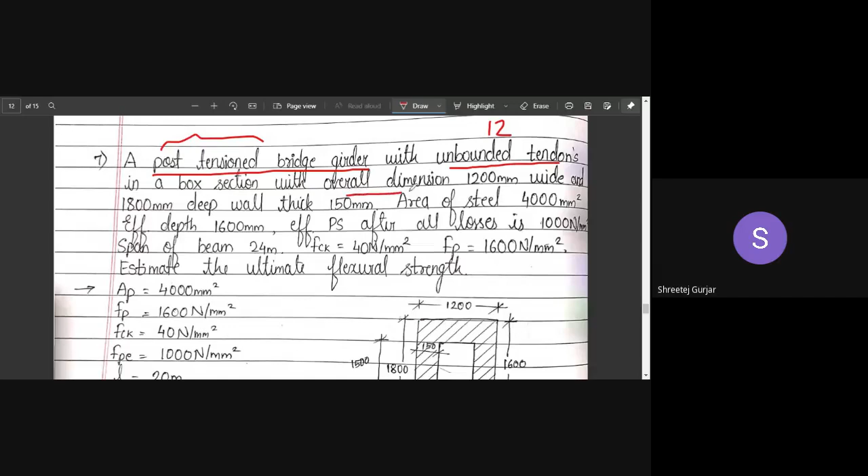Overall dimension is given: 1200 mm wide and 1800 mm deep. Wall thickness is 150 mm, no problem. Area of steel AP is given. Effective depth is also given directly, no problem, along with the effective pre-stress after all the losses.

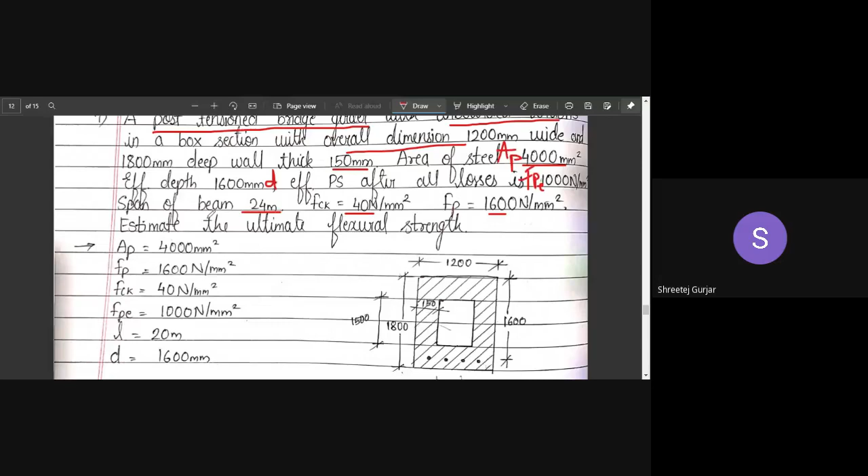FP after all the losses, meaning effective stress, FPE. Span of the beam is given, no problem. FCK value, FP value, all these things are given. So we will be needing all these values. So coming back over here: AP, FP, FCK, FPE, length, and the effective depth. All these values are given.

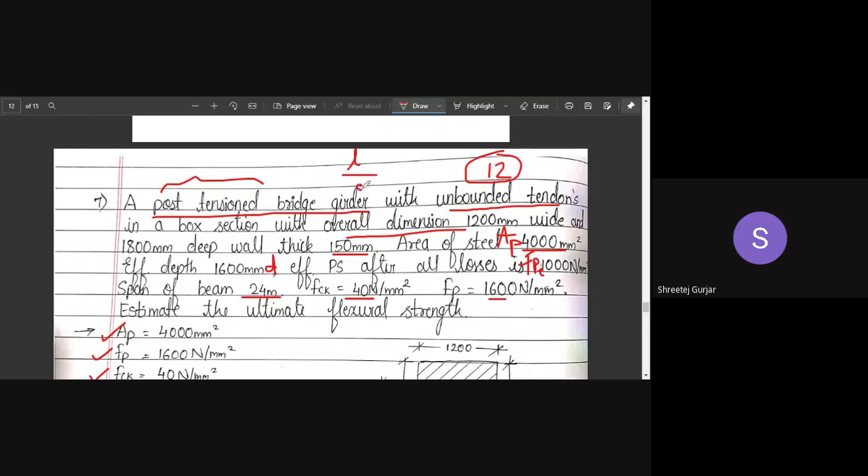So because we are dealing with table number 12, we will be needing the effective span by effective depth ratio. So that is what we will be doing, effective span by effective depth, right? We have got a whole number, very nice, so no need of interpolation over here.

Next, assuming the neutral axis lies within the flange, XU is lesser than DF, first case. So when that is the case, we have to consider this section. So width we have to consider of this, 1200 width we have to consider.

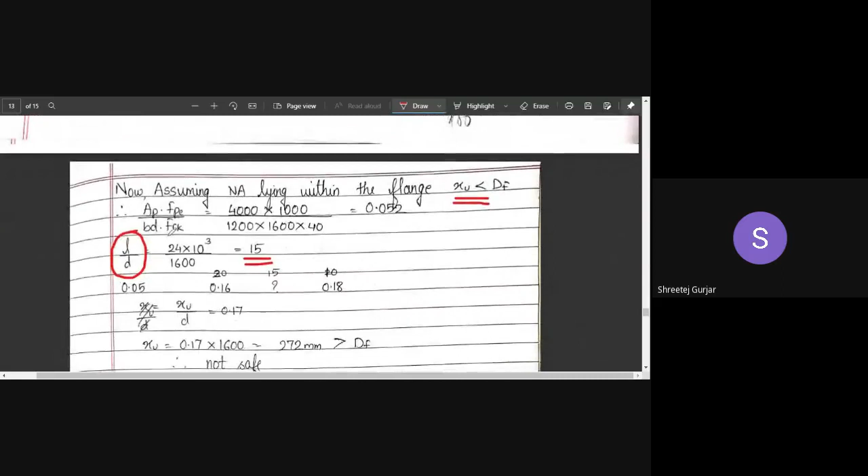So AP, FPE by BD, FCK. B I have told you have to consider 1200. FP value is given as how much, 1000 FPE value. So the particular term value we have got as 0.052. Now let us check in the table where it lies exactly.

So our value of effective span by effective depth was how much? Can you recall? 15, sir. 15, correct, 15. So it is lying here, 15. So what was this value? 0.052. It is over here, lying in between these two.

So you have to take these two values and interpolate. 0.052, you can take it as 0.05 itself, and interpolate to find out. It will be average of these two values, because 15 is in between 10 and 20. You can take directly average and find out this value, or else if you want to do perfect work, you can assume and take whatever value we have got, 0.052.

So you have to interpolate here and also over here. You have to do this double interpolation, or else you can take it at 0.05 and do single interpolation. It's left to you how much accuracy you want.

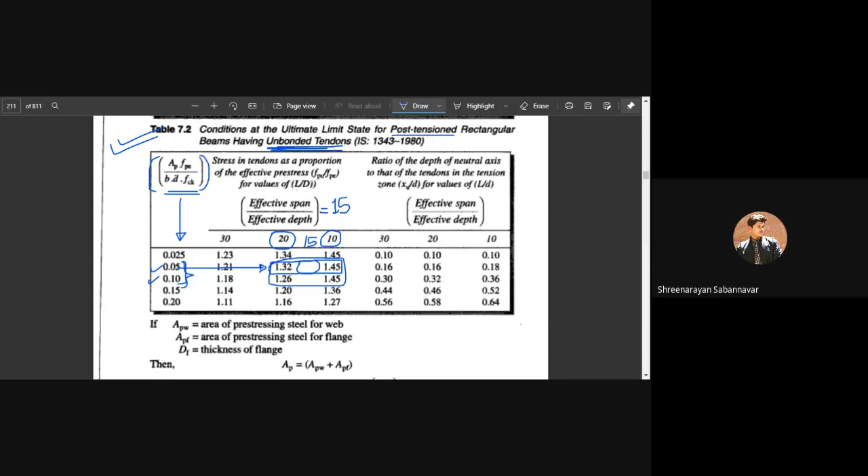Yes sir, yes, okay. Are you there? Are you focusing or have you left? Channa Basu... Manjunath Kamble, sir? I hope you are there. Yes sir. Yes, okay, yes sir. Ranganath, yes sir. Vinayak has joined recently - Vinayak, yes sir.

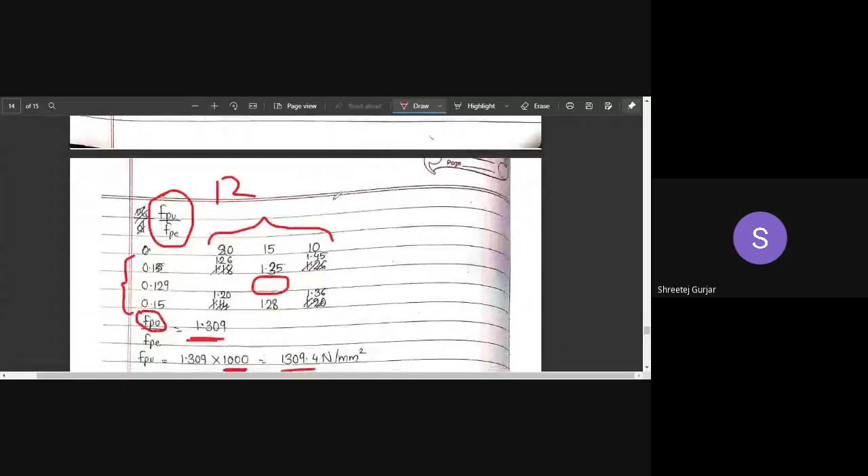Okay, so regarding the eighth numerical, it is an unbonded tendon. It is made up of a flange 300 mm wide and 200 mm thick. Width of the rib is 150 mm. Effective depth of the section is also given as 320, no problem. The beam is pre-stressed by 24 wires, each 5 mm in diameter. Characteristic strength of steel is given, effective stress is also given, FPE value is given, and the cube strength of concrete FCK value is given.

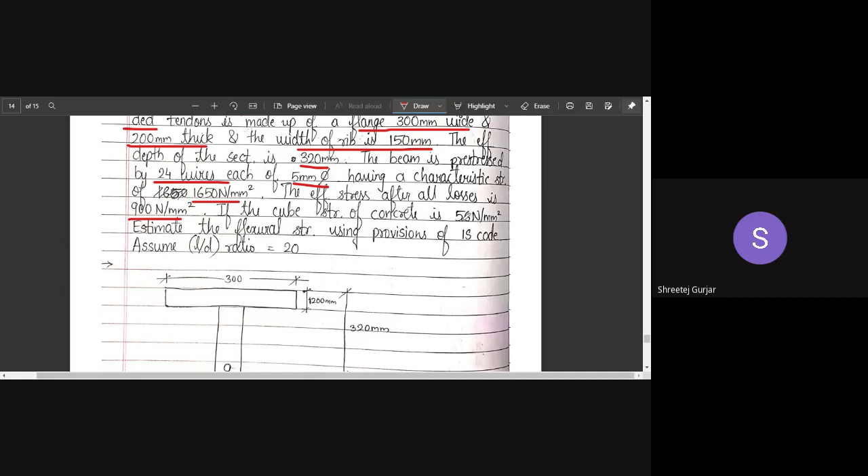Estimate the flexural strength using codal provisions of IS code. Assume L by D ratio as 20. They have directly given it, so no need of calculation.

Next, moving on, we can calculate AP. They have told 24 wires of 5 mm each, so we have got the area of steel. These values are given, this value is also given. This is the effective depth, small d, which is 320.

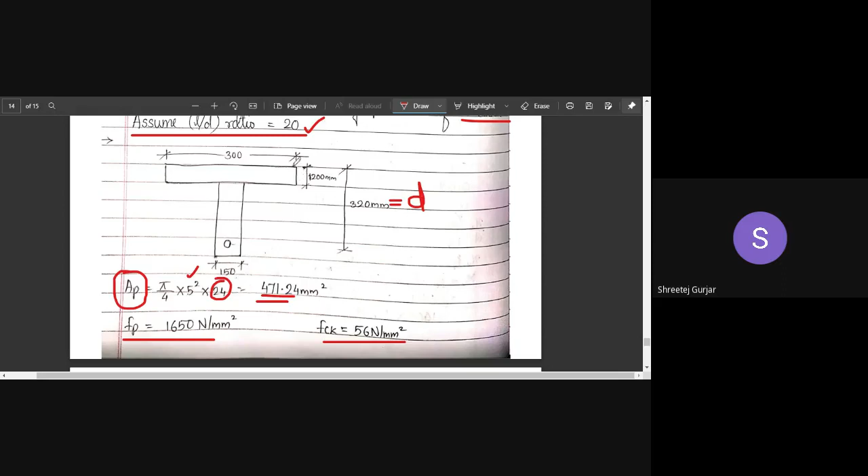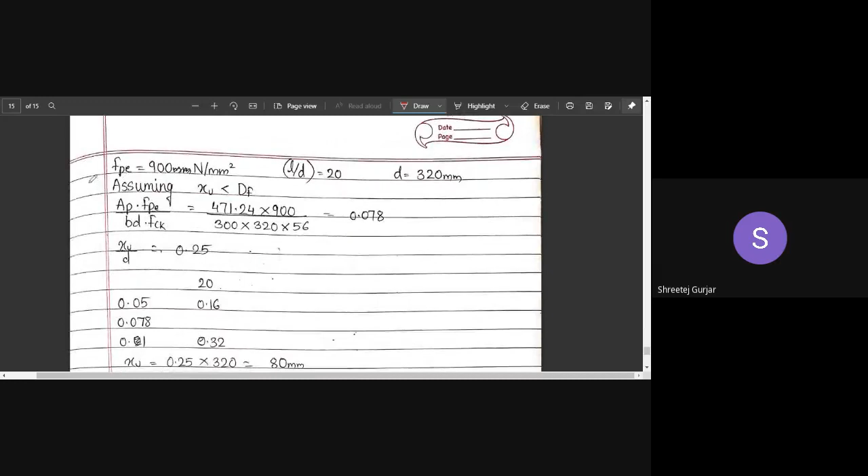So first, which should we assume? We will assume XU is less than DF, or less is within flange, or outside flange. We will assume it is inside the flange, so assuming XU is within the flange, that is XU is lesser than DF.

So AP into FPE by BD FCK. The B which you have to take here is the width of the flange, that is 300, because that is the width we are concerned with. So it comes as...

0.078. So table number 12, right? Table number 12, post tension beam, for a value of 0.078 and L by D ratio of 20. So all these things you have to remember while you check your table.

So effective span by effective depth ratio is 20, here in this part. And then what was this value? 0.078. So it is lying in between these two values. Correct, so you have to interpolate now and find out the in-between value for 0.078.

So what I have done is I have moved forward with this particular thing, so do not calculate this yet. First calculate XU by D. You calculate that first, check whether the assumption is correct, and then move on to this part. First you check for the XU value for the assumption.

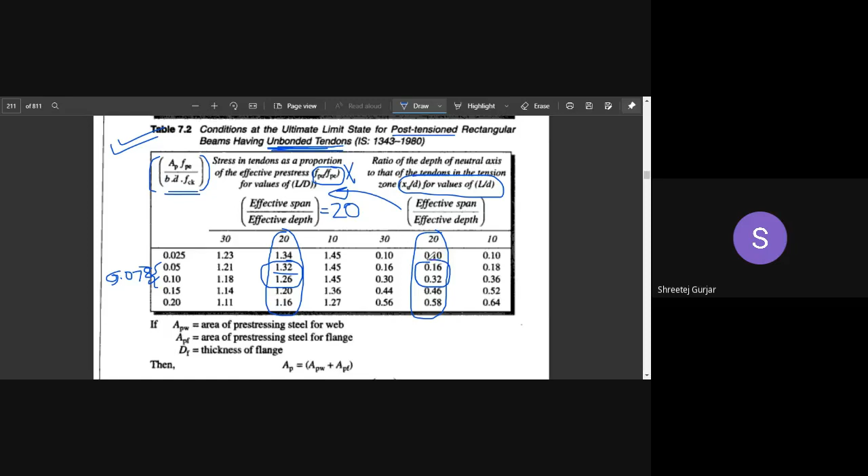So for 20, and for these two values 0.16 and 0.32, you can check. So intermediate value we can interpolate and find out. So the XU value we have got as 80 mm.

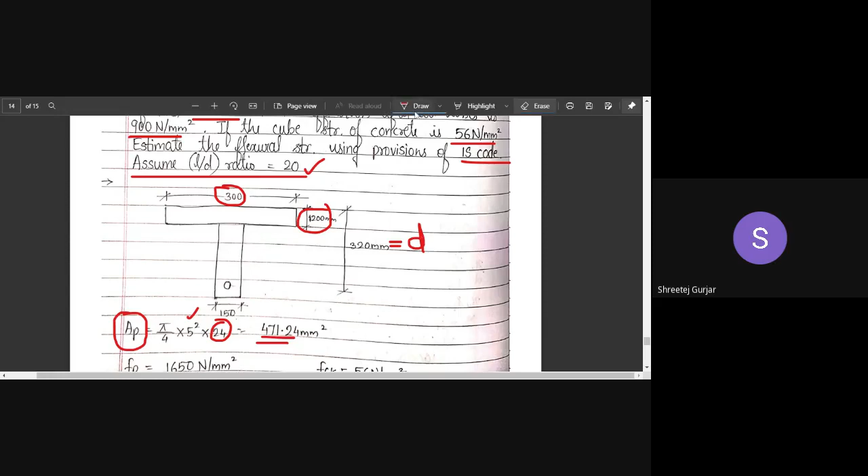So what is the flange thickness? Let us check. It is 1200 mm, very large. The flange is very large, 1200 mm, and the XU value which we have got is 80 mm. So it is clearly lesser than DF, hence our assumption is correct.

No problem, hence we can move forward with the same thing. Okay, FPU by FPE, this value we can find out from the table.

Span by effective depth is 20, and for this particular thing, for 0.078, you can interpolate and find out. So it has come as 1.286.

So FPU will be equal to 1.286 into effective stress, that is 900. So this value we have got. Directly substitute in the moment of resistance formula, the short one, for the rectangular one we know, so we can substitute and find out. Okay, so with this we are done with today's class.

I hope you have understood all the things regarding flexural strength calculation. Yes, sir. Yes, no problem.

Any doubt? Sir, that XU by D calculation is there, no sir? Can we do that for all the problems? I mean, you checked if XU lies within the flange or beyond the flange - can we do that for all the problems, right?

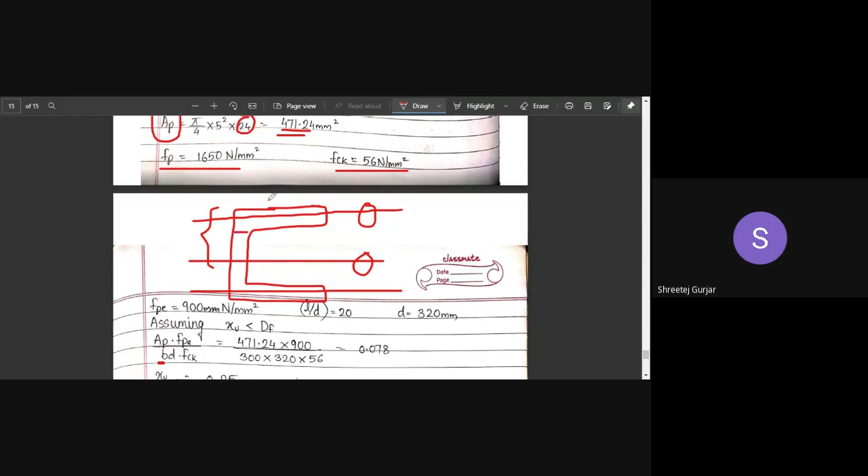See, calculations are same whatever section you take. Formulas will remain same, don't worry. Any other thing?

Sanket, any doubt? No sir. Teju Pattar, no doubt sir, clear. Yes sir, here after many classes? No sir, last class I was present. Okay, then Prerna is here? Yes sir, understood, no problem. Abhishek Aptekar, yes sir, first class or second class? First class sir. This is your first class in the entire sem? Yeah sir. This is your first class attending pre-stressed concrete, huh? Yeah sir. Any specific reason? Sir, due to work. Work, you're working somewhere, huh? Yeah sir, okay no problem. Make sure you have a proper genuine reason to give later on when you face trouble for attendance. Okay sir, no problem.